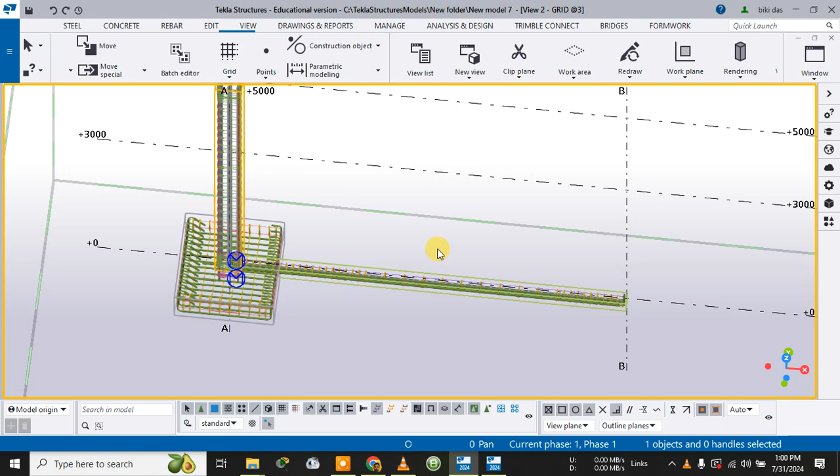So in today's lecture I'll be telling about how to provide the reinforcements in the continuous beam. So before that, let me do one thing. Let me provide some continuous beams. So let me press Ctrl P. After pressing Ctrl P, now I will provide the beams. Let me go to the 3D view.

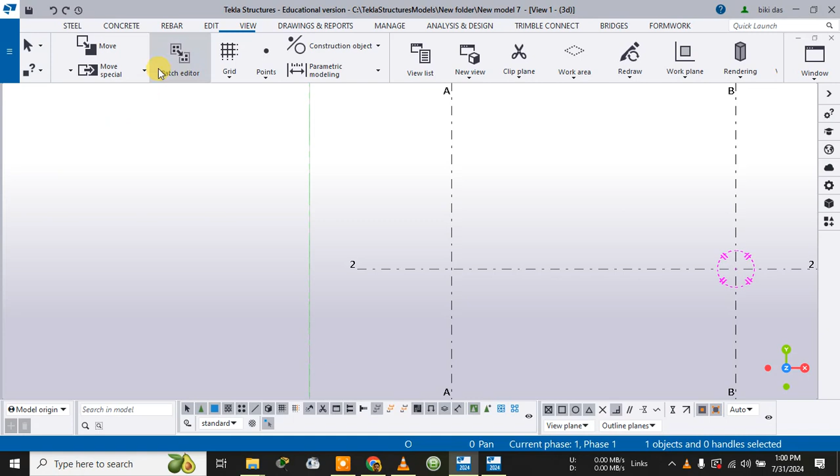As I have provided here the 3D view, let me provide here concrete columns: one column, then new column, second column and third column. After providing the concrete columns, now let me provide here the beams from here to here and from here to here. So these are the continuous beams. And now right click and click on interrupt.

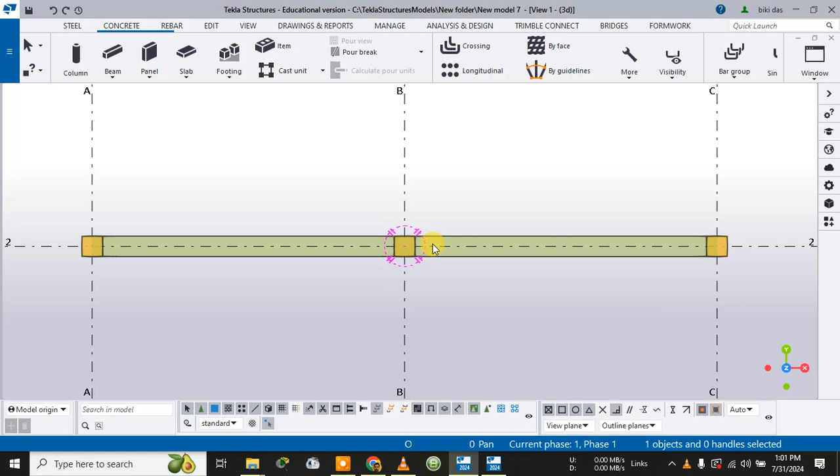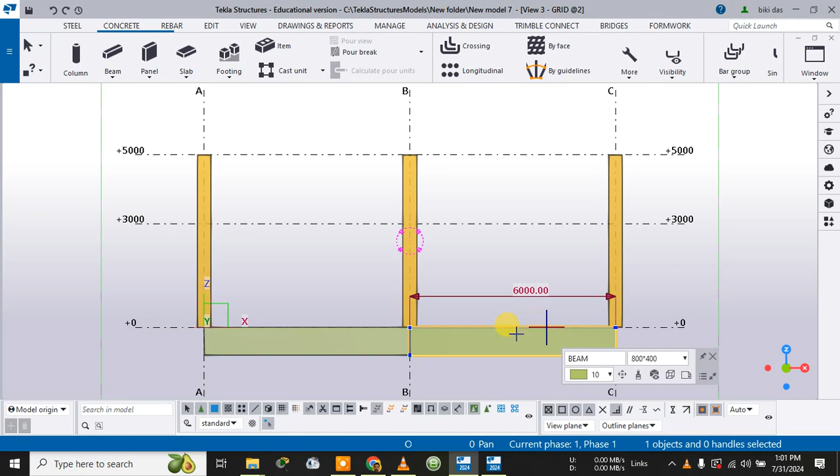Now let me check the 2 section view. For that you need to press Ctrl I. After pressing Ctrl I, go to the grid number 2, show here and click on OK. As you can see here, now the beams are present at the bottom. So let me lift these 2 beams, and for that I will double click on this beam.

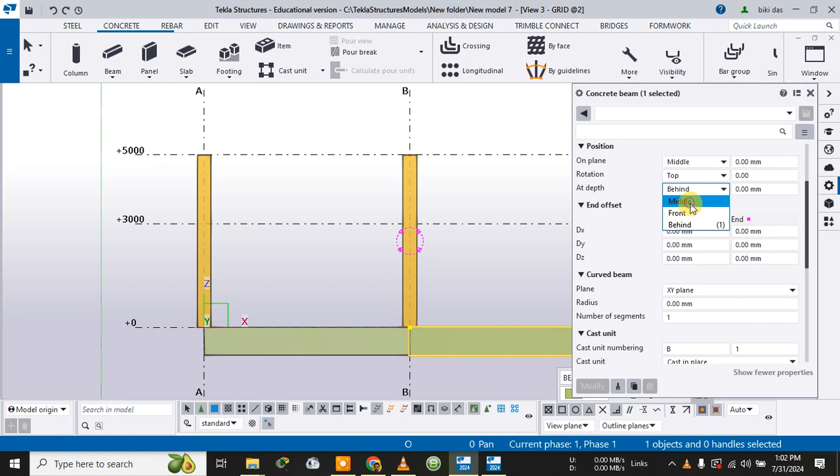After double clicking on this beam, as you can see here, let me provide these beams at 300 mm or suppose at 1000 mm. So I will provide here their height. Suppose these are actually provided behind. Let me provide here at the middle. Now it will be provided at the middle of the line. Similarly, for this one I will provide at the middle of the line.

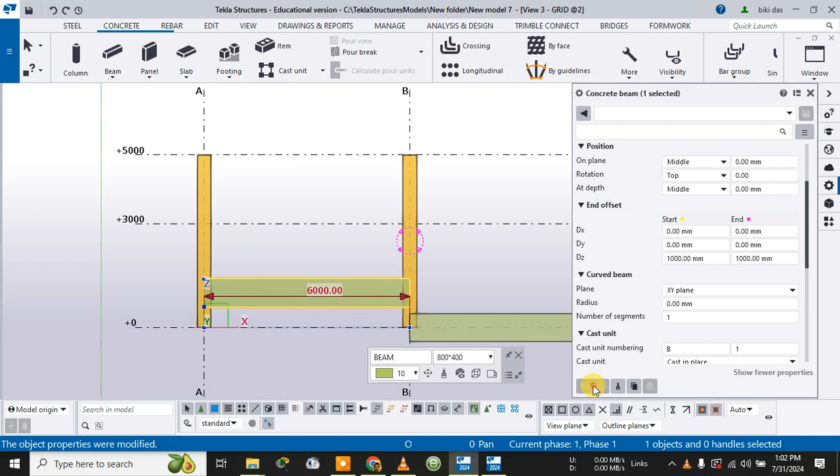After providing at the middle of the line, now let me provide those with the DZ. So in the Z I will provide the height, suppose 1000 mm, modify it. Now again provide here 1000 mm, modify it. So this is the beam which I have increased here. Similarly I will increase the height for the second beam, 1000 mm, modify it. So this is how I have provided the beams.

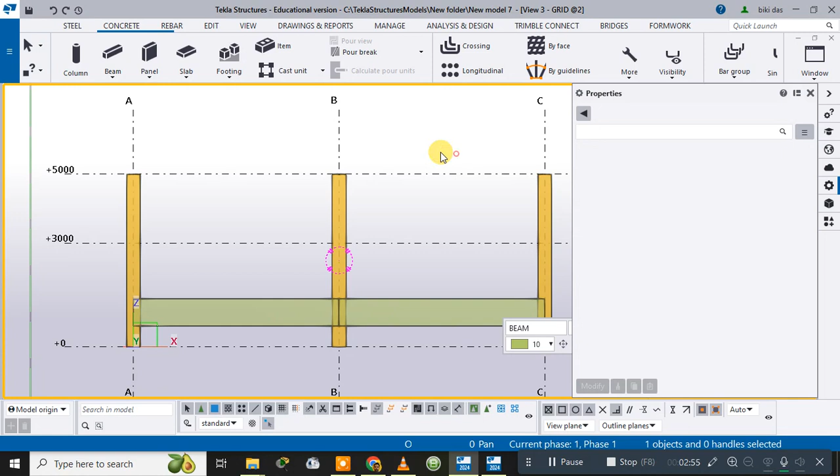Let me close these properties, and as you can see here, this beam has been provided from this section to this section, and there is an intersection mark provided at this section. Then after that it is provided to this section. So let me provide one continuous beam.

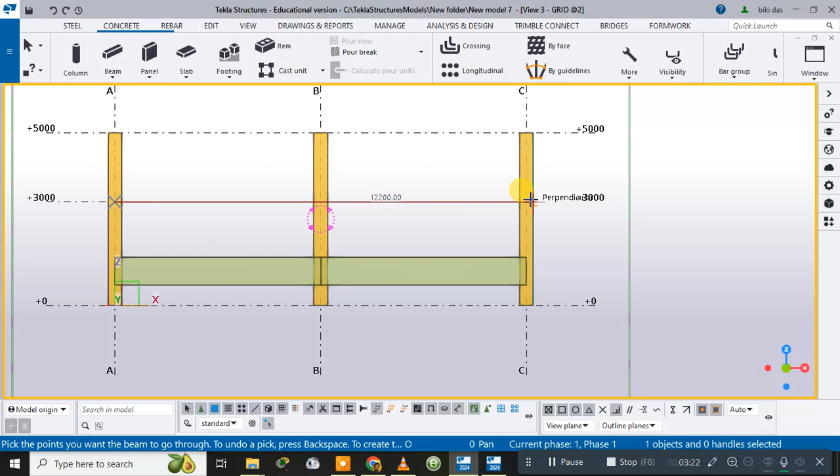For that, go to the beam and, selecting beam, select the poly beam. After selecting poly beam, this one is the intersection point, and after that provide the beam up to this portion, and after clicking it here, press the middle mouse button. So as you can see here, now the beam is provided and it is passing through the column. So this is one type of continuous beam.

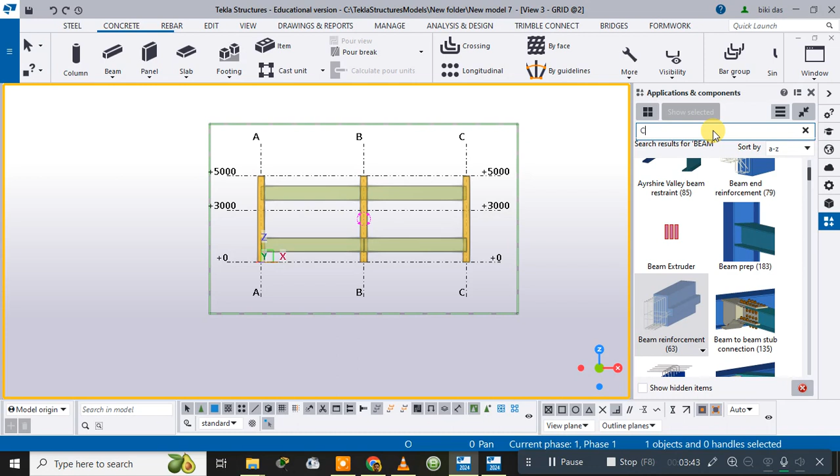So after providing the continuous beam, I will go to this section and search continuous beam. As you can see here, continuous beam reinforcement. I will click on this continuous beam reinforcement. So after clicking, this menu arises. Now as you can see here in this menu, beams.

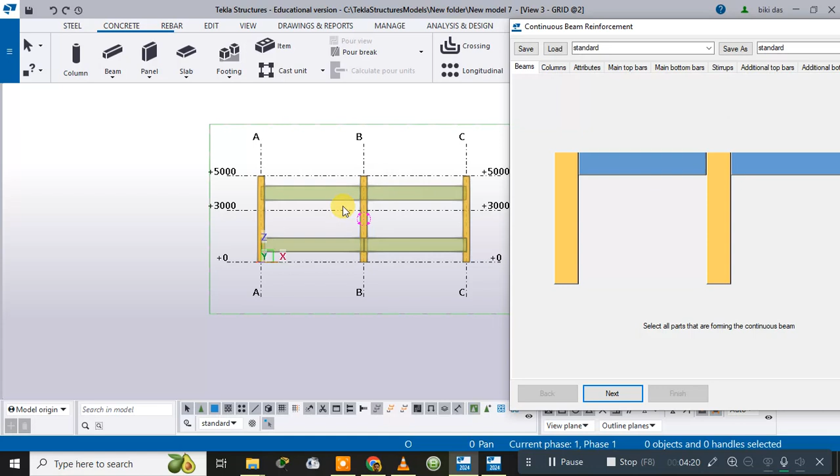So first I have to select the beams. Okay, so first I will select the beam. Suppose I will select this beam. Now after that let me select the columns. This one is the one column. By pressing the Control key, select the columns one by one.

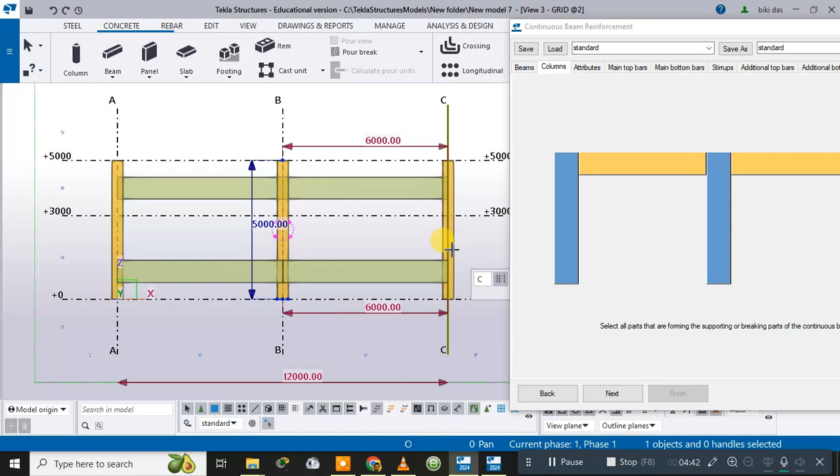This one is the one column, this one is the second column. Zoom it, and this one is the third column. So I have now selected the columns.

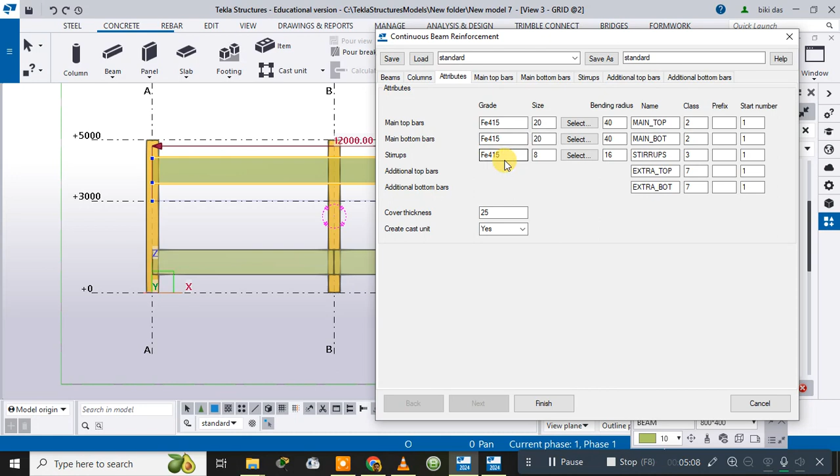Now press next. After that I can change these values, such as main top bars of Fe 415 grade, 20 mm size, bottom bar size of 20 mm, stirrups of Fe 415, 8 mm size. I can select each and everything. Then for the main top bars, how much bending radius we should provide.

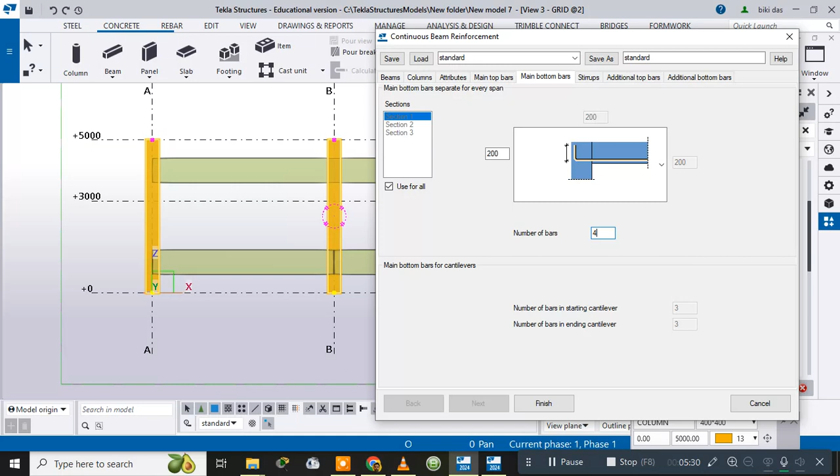Similarly, how many bars are required? Suppose I will provide here 4 bars. Then main bottom bars, how many are required? Provide here also 4. Then what will be the stirrup spacing and stirrup sizes. Then additional top bars at the columns.

Here one bar will be present. At the second column there will be another bar, and at the third column another bar will be present here. So how much spacing will be provided, how many bars need to be provided, everything you can select accordingly and change accordingly.

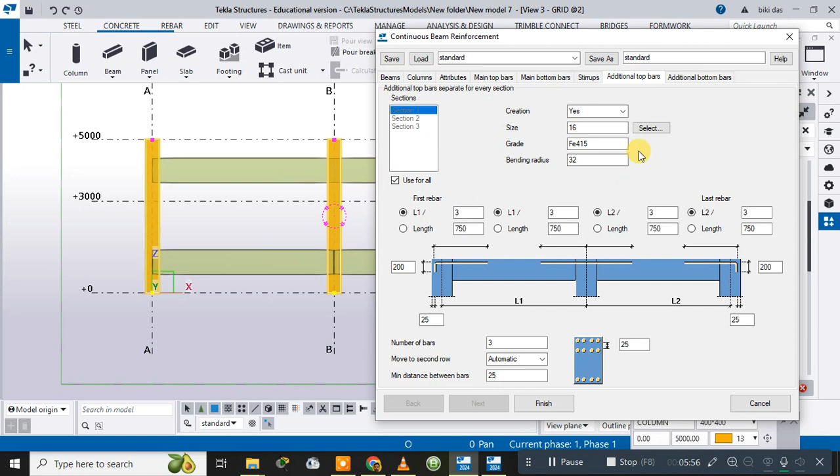Now go to the additional bottom bars. Additional bottom bars need to be provided, how many bars are required. So everything you can change accordingly. After that click on finish. Okay, an unspecified error occurred during the command execution. Still it's showing an error.

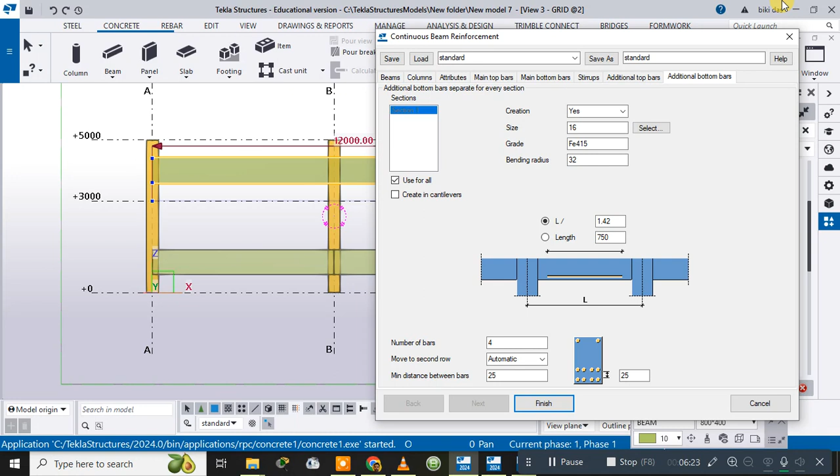The main reason behind the error is that the beam provided here is moving through the column. So instead of providing this kind of poly beam, let me provide the continuous beam. For that, select the continuous beam. After selecting the continuous beam, I will select the beams.

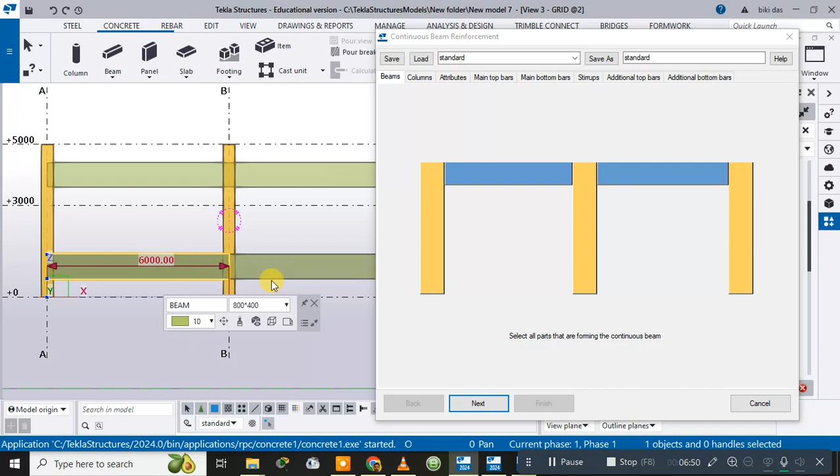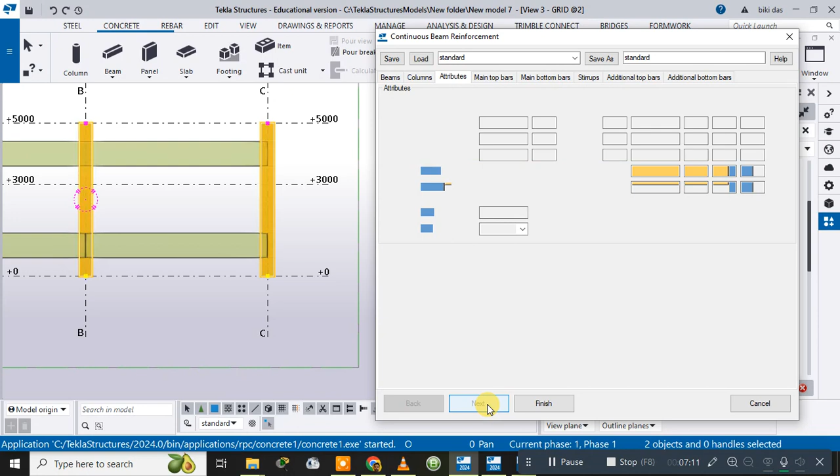Let me select one beam. Let me select another beam. Selected. Now you need to select the columns. One column selected. Second column selected. Now I need to select the third column. Selected. Now click on next. After that, as I have shown you, these are the various changes. Now simply click on finish.

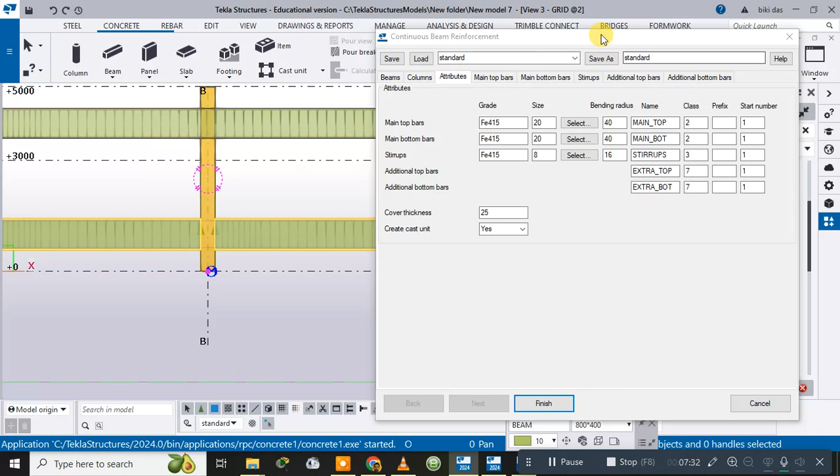Now after clicking finish, as you can see, these are the various reinforcements provided at both the top beam as well as bottom beams. So this is how we can provide the reinforcements. Now click on cancel. As you can see, in both the poly beam as well as in these beams we can provide the reinforcements. So hope it's clear to all of you that in this manner we can provide the beams.

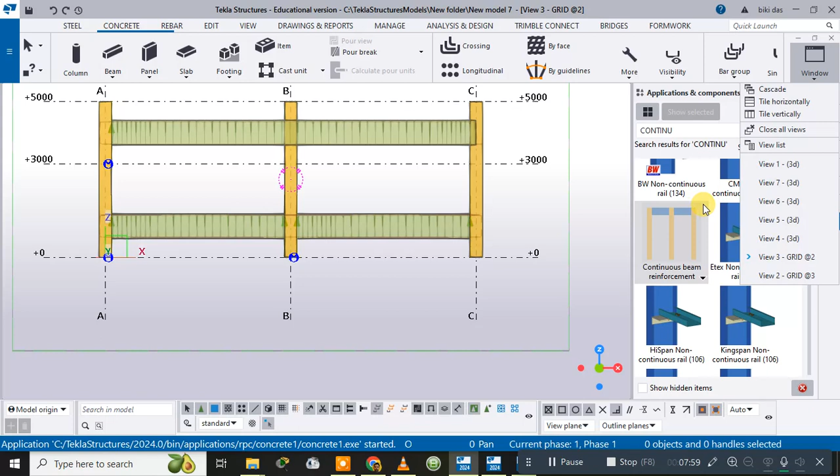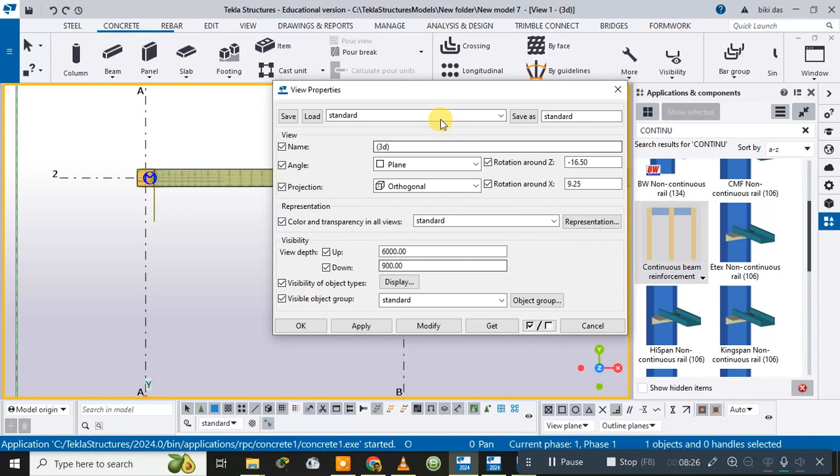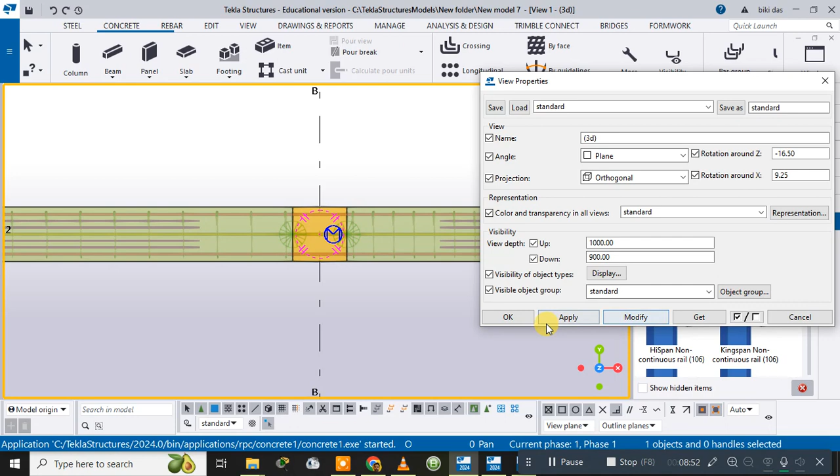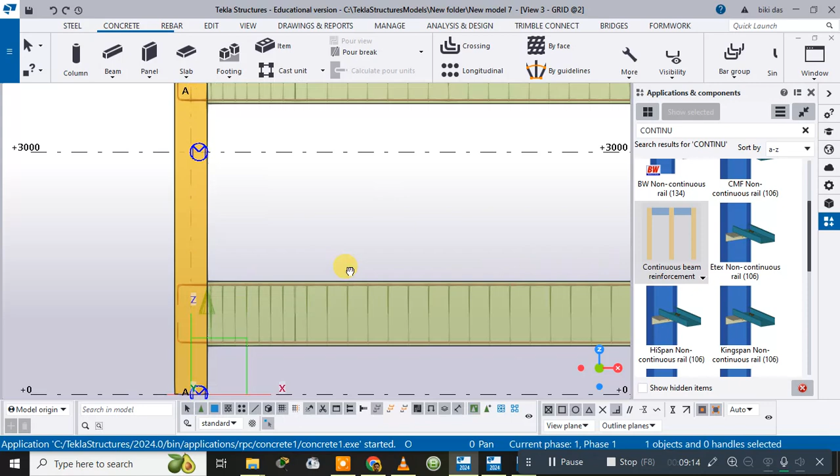Okay, so hope it's clear how to provide the different types of beams. Let me go to the 2D section again and show you. This one is one type of beam, and this one is another type of beam. This one is created with the poly beam, whereas this one is created with the normal beam. But in both, the reinforcement is presented in a similar manner.

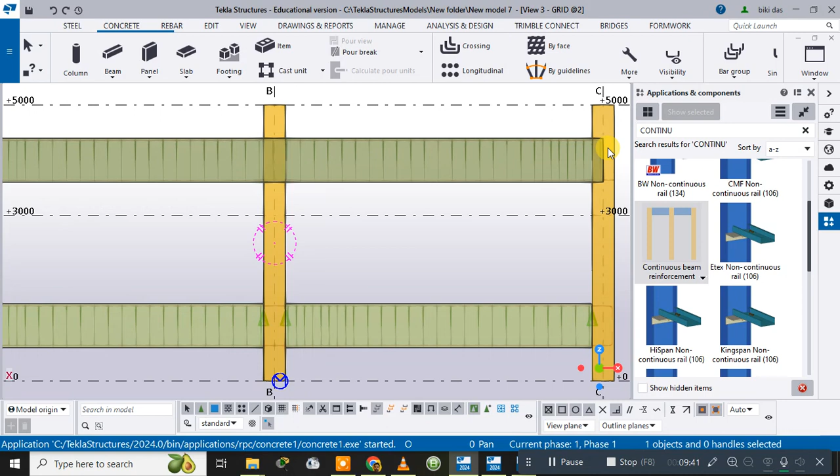The only difference is this beam is acting like a monolithic beam, because it is even passing through the column, whereas here a separation is present. So hope it's clear how to provide the beam reinforcements. For the continuous beam, we have to provide the continuous beam reinforcement in this manner, and we can make the changes accordingly.